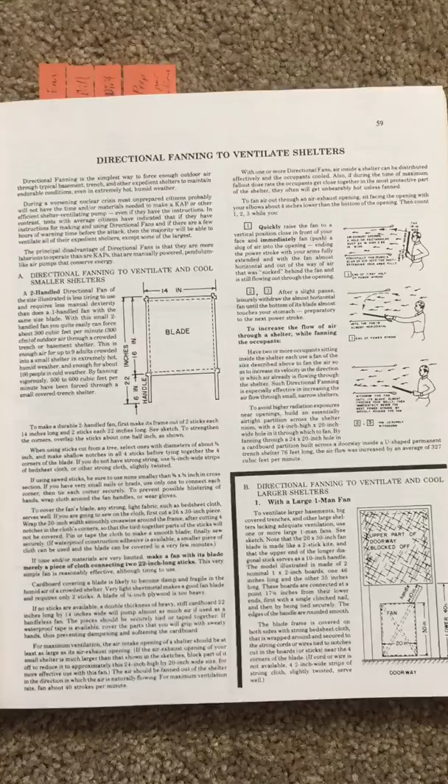Directional fanning to ventilate shelters. Directional fanning is the simplest way to force enough outdoor air through typical basement, trench, and other expedient shelters to maintain endurable conditions, even in extremely hot, humid weather.

During a worsening nuclear crisis, most unprepared citizens probably will not have the time and/or materials needed to make a KAP or other efficient shelter ventilating pump, which I covered in that previous chapter. If you want a little more information on that, watch that video.

Tests with average citizens have indicated that if they have instructions for making and using directional fanning, and if there are a few hours of warning time before the attack, then the majority will be able to ventilate all of their expedient shelters except some of the largest.

The principal disadvantage of directional fans is that they are more laborious to operate than KAPs, which are manually powered, pendulum-like air pumps that conserve energy.

Directional fanning to ventilate and cool small shelters. A two-handled directional fan of the size illustrated is less tiring to use and requires less manual dexterity than a one-handled fan with the same size blade.

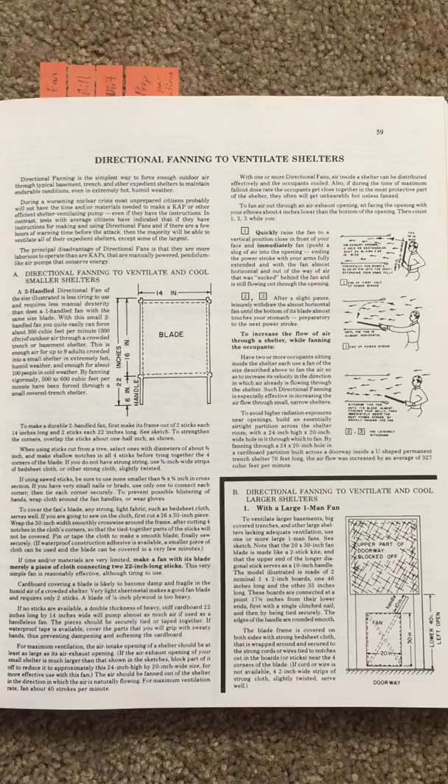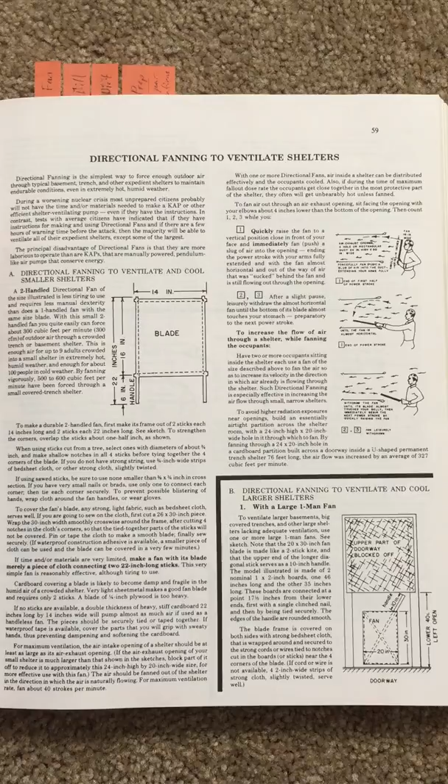With this small two-handled fan, you can quite easily force about 300 cubic feet per minute of outdoor air through a crowded trench or basement shelter. This is enough air for up to 9 adults crowded into a small shelter in extremely hot, humid weather, and enough for about 100 people in cold weather.

By fanning vigorously, 500 to 600 cubic feet per minute have been forced through a small covered trench shelter. Here's the diagram of that.

To make a durable two-handled fan, first make its frame out of 2 sticks, each 14 inches long, and 2 sticks about 22 inches long. To strengthen the corners, overlap the sticks about 1/2 inch as shown. When using sticks cut from a tree, select ones with diameters of about 3/4 inch and make shallow notches in all 4 sticks before tying together the 4 corners of the blade.

If you do not have strong string, use 3/4 inch wide strips of bedsheet cloth or other strong cloth slightly twisted. If using sawed sticks, be sure to use none smaller than 3/8 by 3/4 inch in cross section. If you have very small nails or brads, use only one to connect each corner, then tie each corner securely. To prevent possible blistering of the hands, wrap cloth around the fan handles or wear gloves.

To cover the fan's blade, any strong, light fabric, such as bedsheet cloth, serves well. If you are going to sew on the cloth, first cut a 26 by 30 inch piece. Wrap the 30 inch width smoothly crosswise around the frame after cutting 4 notches in the cloth's corners, so that the tied together parts of the sticks will not be covered.

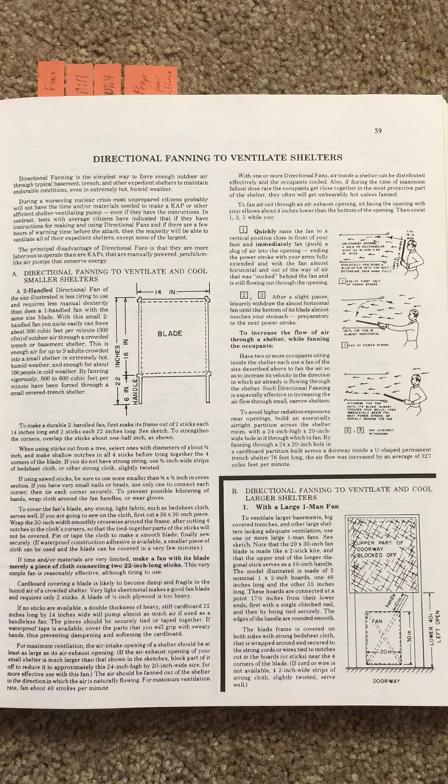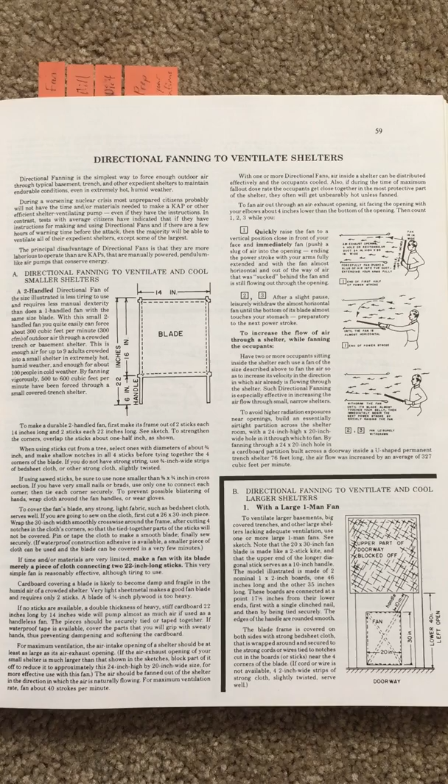Then count 1, 2, 3 while you quickly raise the fan to a vertical position close in front of your face, and immediately push a slug of air into the opening, ending the power stroke with your arms fully extended and with the fan almost horizontal and out of the way of air that was sucked behind the fan and is still flowing through the opening.

Here's the diagram of that. 2, 3.

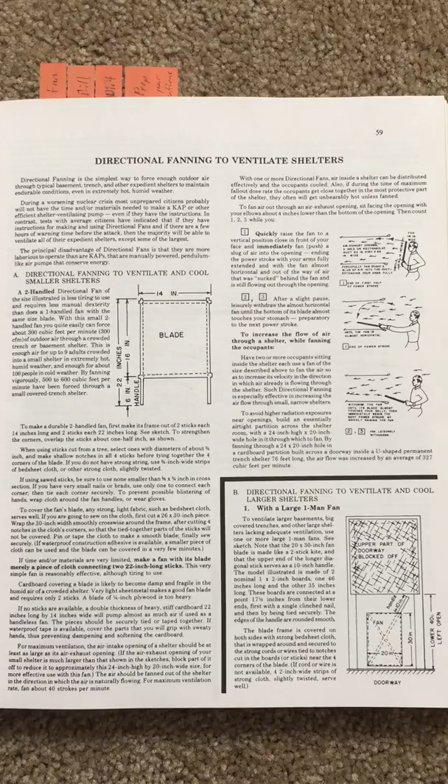After a slight pause, leisurely withdraw the almost horizontal fan until the bottom of its blade almost touches your stomach, preparatory to the next power stroke.

To increase the flow of air through a shelter while fanning the occupants, have 2 or more occupants sitting inside the shelter, each use a fan of the size described above to fan the air so as to increase its velocity in the direction in which air already is flowing through the shelter.

Such directional fanning is especially effective in increasing the airflow through small, narrow shelters. To avoid higher radiation exposures near openings, build an essentially airtight partition across the shelter room with a 24-inch high by 20-inch wide hole in it through which to fan.

By fanning through a 24 by 20-inch hole in a cardboard partition built across a doorway inside a U-shaped permanent trench shelter 76 feet long, the airflow is increased by an average of 327 cubic feet per minute.

All right, so there are those diagrams about the directional fanning. Okay, B, directional fanning to ventilate and cool large shelters.

With a large one-man fan, to ventilate larger basements, big covered trenches, and other large shelters lacking adequate ventilation, use 1 or more large one-man fans.

See sketch. Note that the 20 by 30-inch fan blade is made like a 2-stick kite, and that the upper end of the longer diagonal stick serves as a 10-inch handle.

The model illustrated is made of 2 nominal 1 by 2-inch boards, one 46 inches long and the other 35 inches long. These boards are connected at a point 17.5 inches from their lower ends, with a single clinch nail, and then by being

tied securely. The edges of the handle are rounded smooth. The blade frame is covered on both sides with strong bedsheet cloth that is wrapped around and secured to the strong cords or wires

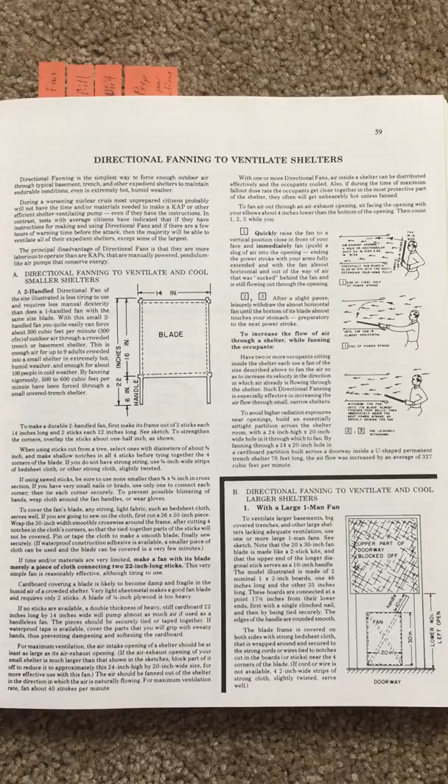wires tied to notches cut in the boards or sticks near the 4 corners of the blade. If cord or wire is not available, 4 2-inch wide strips of strong cloth, slightly twisted, serve well.

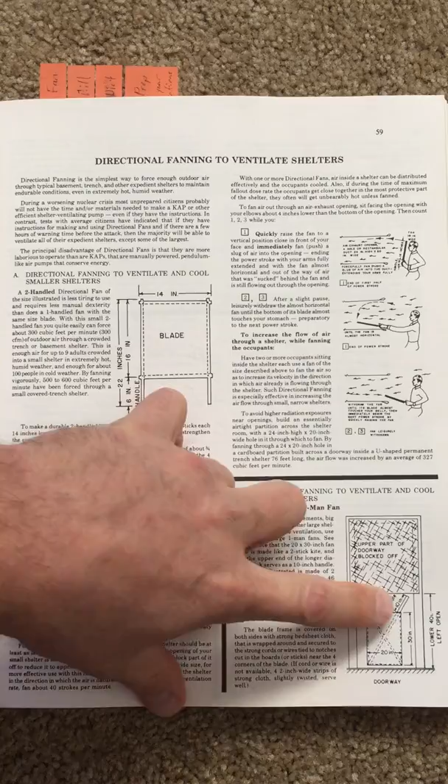All right, so upper part of the doorway blocked, and then it's a 30-inch by 20-inch fan, and then just the crossbars. All right, and next page.

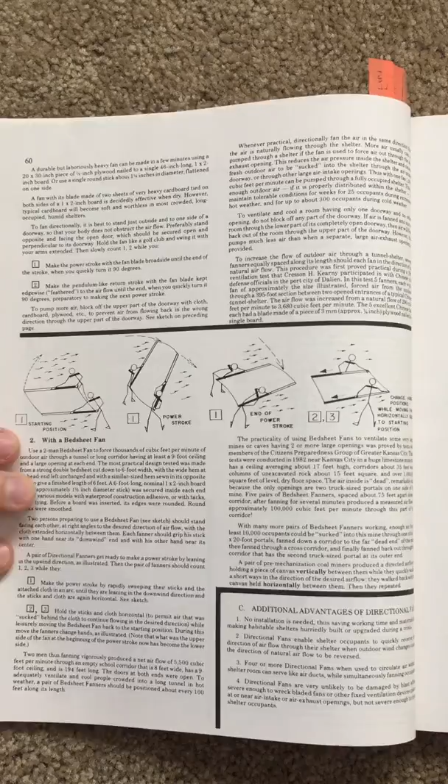Might not be able to read this on YouTube. It's not coming up very well, but okay.

A durable but laboriously heavy fan can be made in a few minutes using a 20 by 30 inch piece of 1/4 inch plywood nailed to a single 46 inch long 1 by 2 inch board, or use a single round stick about 1 1/4 inches in diameter, flattened on one side.

A fan with its blade made of 2 sheets of very heavy cardboard tied on both sides of a 1 by 2 inch board is decidedly effective when dry. However, typical cardboard will become soft and worthless in most crowded, long-occupied, humid shelters.

To fan directionally, it is best to stand just outside and to one side of a doorway so that your body does not obstruct the airflow. Preferably stand opposite and facing the open door, which should be secured open and perpendicular to its doorway.

Hold the fan like a golf club and swing it with your arms extended. Slowly count 1, 2. Make the power stroke with the fan blade broadside until the end of the stroke, when you quickly turn it 90 degrees. Then make the pendulum-like return stroke with the fan blade kept edgewise, feathered to the airflow until the end, when you quickly turn it 90 degrees, preparatory to making the next power stroke.

To pump more air, block off the upper part of the doorway with cloth, cardboard, plywood, etc., to prevent air from flowing back in the wrong direction through the upper part of the doorway. See sketch on preceding page.

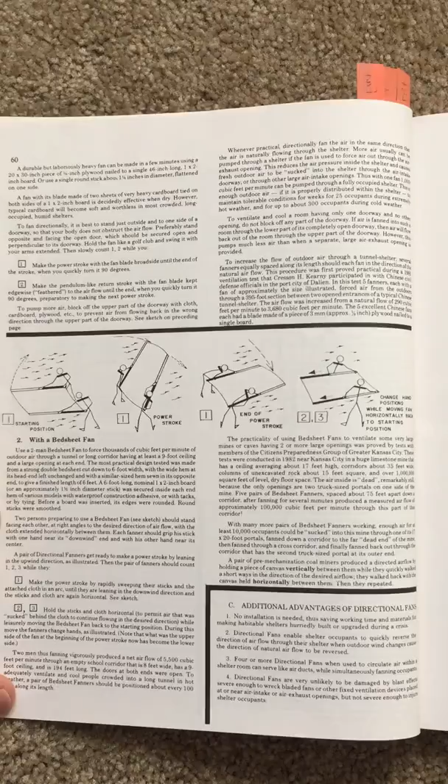Whenever practical, directionally fan the air in the same direction that the air is naturally flowing through the shelter. More air usually can be pumped through a shelter if the fan is used to force air out through...

More air usually can be pumped through a shelter if the fan is used to force air out through the air exhaust opening. This reduces the air pressure inside the shelter and causes fresh outdoor air to be sucked into the shelter through the air intake doorway or through other large air intake openings.

Thus, with one fan, 1,000 cubic feet per minute can be pumped through a fully occupied shelter. This is enough outdoor air, if properly distributed within the shelter, to maintain tolerable conditions for weeks, for 25 occupants during extremely hot weather, and for up to 300 occupants during cold weather.

To ventilate and cool a room having one doorway and no other opening, do not block off any part of the doorway. If air is fanned into such a room through the lower part of its completely open doorway, then air will flow back out of the room through the upper part of the doorway. However, this pumps much less air than when a separate large air exhaust opening is provided.

To increase the flow of outdoor air through a tunnel shelter, several fanners equally spaced along its length should each fan in the direction of the natural airflow. This procedure was first proved practical during a 1981 ventilation test that Cresson H. Kearny participated in with Chinese civil defense officials in the port city of Dalian.

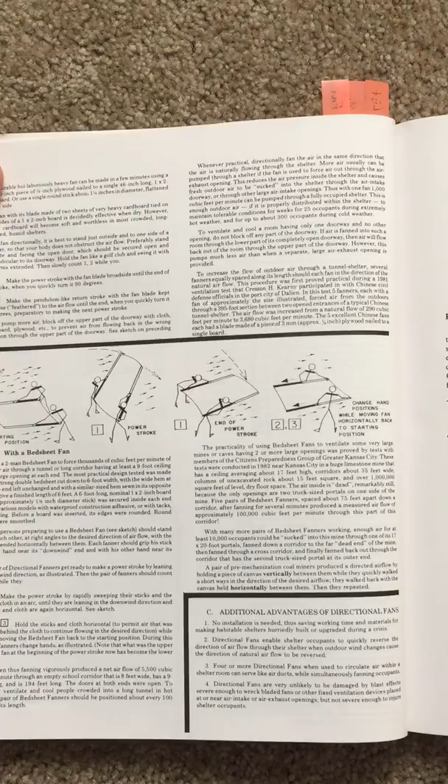In this test, 5 fanners, each with a fan of approximately the size illustrated, forced air from the outdoors through a 395-foot section between 2 open entrances of a typical Chinese tunnel shelter.

The airflow was increased from a natural flow of 290 cubic feet per minute to 3,680 cubic feet per minute. The 5 excellent Chinese fans each had a blade made of a piece of 3 millimeter, approximately 1/8 of an inch, plywood nailed to a single board.

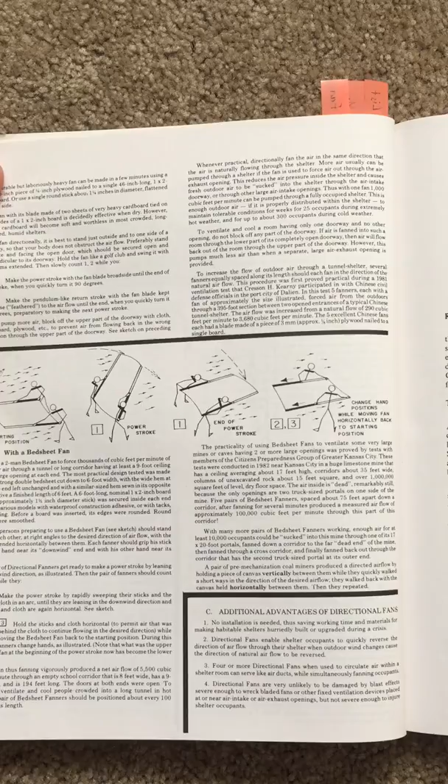Okay, and then here's the diagram, the 2-person. Okay, and then 2 with a bed sheet fan.

Use a two-man bed sheet fan to force thousands of cubic feet per minute of outdoor air through a tunnel or a long corridor, having at least a 9-foot ceiling and a large opening at each end.

The most practical design tested was made from a strong double bed sheet cut down to 6-foot width, with the wide hem of its head end left unchanged, and with a similar sized hem sewn in the opposite end, to give a finished length of 6 feet.

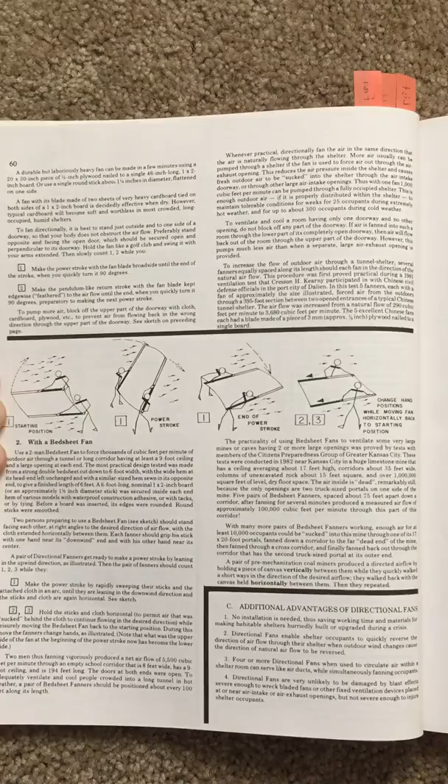A 6-foot long nominal 1 by 2 inch board, or approximately a 1 1/4 inch diameter stick, was secured inside each end hem of various models with waterproof construction adhesive, with tacks, or by tying. Before a board was inserted, its edges were rounded. Round sticks were smooth.

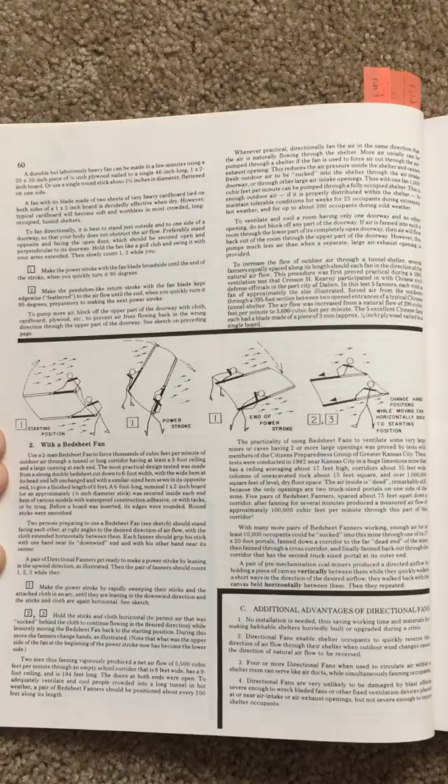Two persons preparing to use a bedsheet fan should stand facing each other at right angles to the desired direction of airflow, with the cloth extended horizontally between them. Each fanner should grip his stick with one hand near its downwind end and the other hand near its center. A pair of directional fanners get ready to make a power stroke by leaning in the upwind direction, as illustrated.

The pair of fanners count 1, 2, 3 while making the power stroke by rapidly sweeping their sticks and the attached cloth in an arc until they are leaning in the downwind direction and the sticks and cloth are again horizontal. They hold the sticks and cloth horizontal to permit air sucked behind the cloth to continue flowing in the desired direction, while leisurely moving the bedsheet fan back to the starting position.

During this move, the fanners change hands, as illustrated. Note that what was the upper side of the fan at the beginning of the power stroke now becomes the lower side. Two men fanning vigorously this way produce a net airflow of 5,500 cubic feet per minute through an empty school corridor that is 8 feet wide, has a 9-foot ceiling, and is 194 feet long.

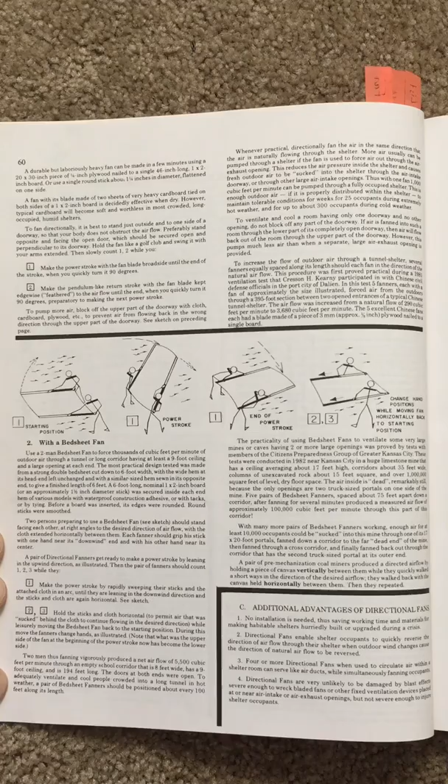The doors at both ends were open to adequately ventilate and cool people crowded into a long tunnel in hot weather. A pair of bedsheet fanners should be positioned about every 100 feet along its length. The practicality of using a bedsheet fan to ventilate some very large mines or caves having two or more large openings was proved by tests.

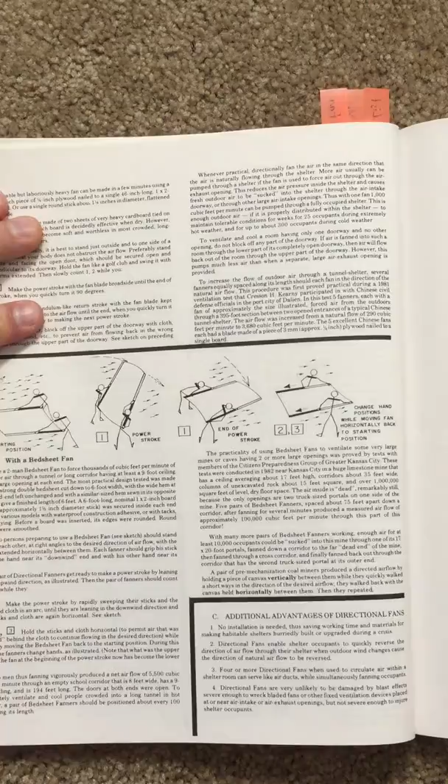These tests were conducted with members of the Citizens Preparedness Group of Greater Kansas City in 1982 near Kansas City, in a huge limestone mine with a ceiling averaging about 17 feet high, corridors about 35 feet wide, and columns of unexcavated rock about 15 feet square, over 1 million square feet of level dry floor space.

The air inside is dead and remarkably still, because the only openings are two truck-sized portals on one side of the mine. Five pairs of bedsheet fanners spaced about 75 feet apart down a corridor, after fanning for several minutes, produced a measured airflow of approximately 100,000 cubic feet per minute through this part of the corridor.

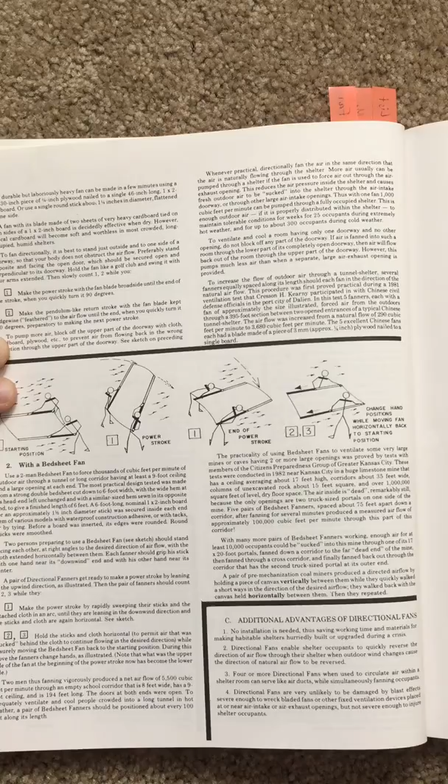With many more pairs of bedsheet fanners working, enough air for at least 10,000 occupants could be sucked into this mine through one of its 17 by 20 foot portals, fanned down a corridor to the far dead end of the mine, fanned through a cross corridor, and finally fanned back out through the corridor that has a second truck-sized portal at its outer end.

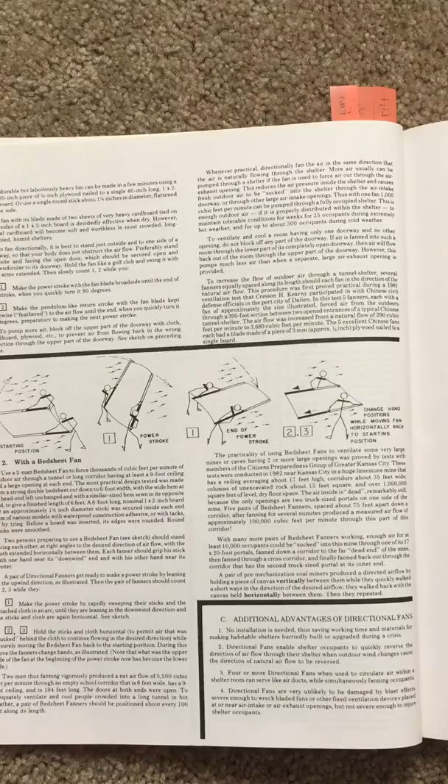A pair of pre-mechanization coal miners produced a directed airflow by holding pieces of canvas vertically between them while they quickly walked a short ways in the direction of the desired airflow. They walked back with the canvas held horizontally between them, then repeated the process.

Additional advantages of directional fans: First, no installation is needed, saving working time and materials for making habitable shelters hurriedly built or upgraded during a crisis.

Second, directional fans enable shelter occupants to quickly reverse the direction of airflow through the shelter when outdoor wind changes cause the direction of natural airflow to be reversed.

Third, four or more directional fans, when used to circulate air within a shelter room, can serve like air ducts while simultaneously fanning occupants. Fourth, directional fans are very unlikely to be damaged by blast effects severe enough to wreck bladed fans or other fixed ventilation devices placed at or near air intake or exhaust openings, but not severe enough to injure shelter occupants.

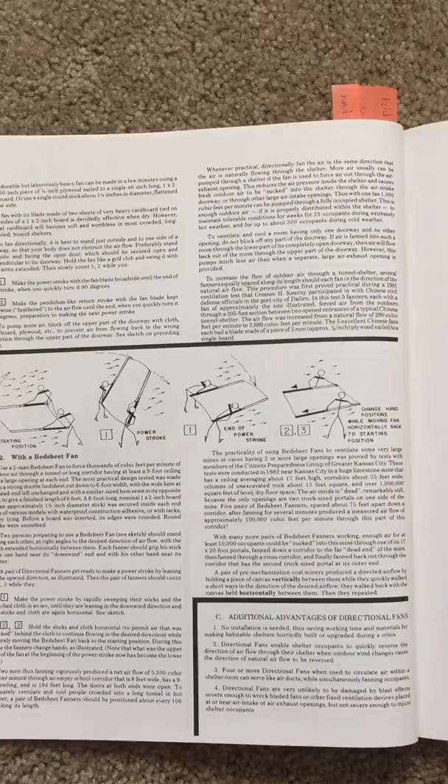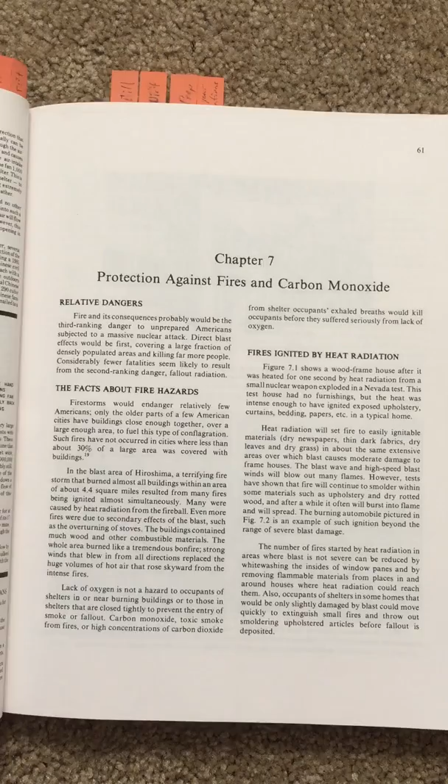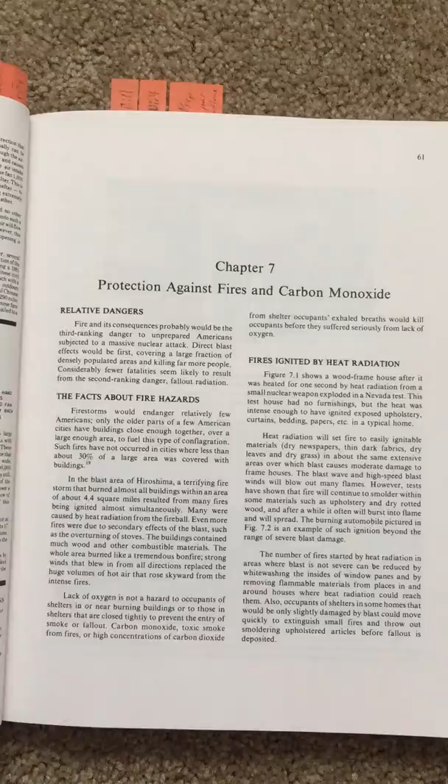All right, that was a little longer than I thought. But okay, I'll do chapter 7 next, which is again just a kind of extension of chapter 6. In hot areas, ventilation and cooling of a shelter is pretty critical, especially if there are a lot of people in the shelters. So I just wanted to cover that in detail.